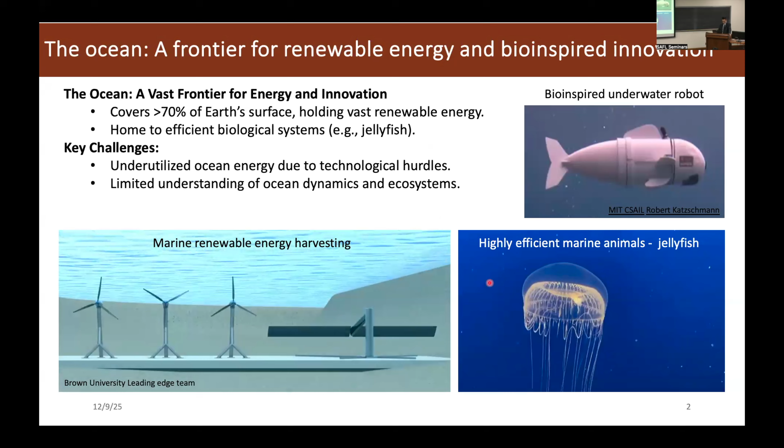But despite those potentials and innovations, ocean energy is still underutilized due to many technological challenges, for example, harsh conditions, difficulties in maintenance, etc. And our understanding of this ecosystem is also limited, and thus there is an urgent need to advance technologies and innovations to help us explore this underwater environment. The good news is that nature has solved many of those challenges for us. For example, marine animals, jellyfish, and krill have evolved highly efficient ways to move, and we can use these strategies to inspire the design of bio-inspired robots and energy harvesting systems.

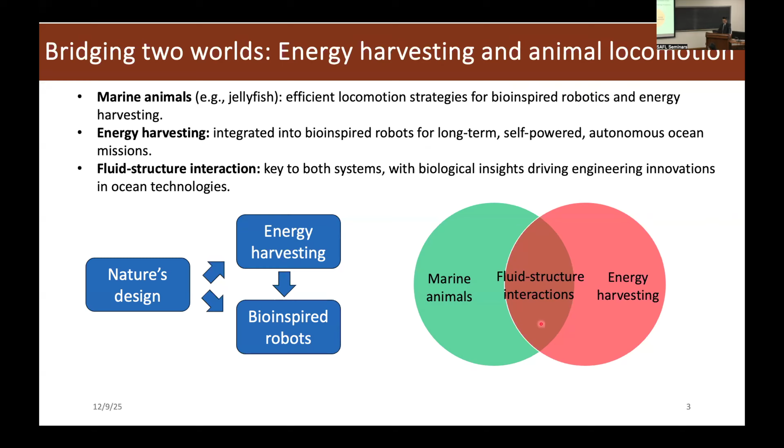And those energy harvesting systems can also be miniaturized and integrated into bio-inspired robots to enable long-term self-powered autonomous ocean missions, which also reduces the reliance on external power sources and extends operational capabilities. The key aspect between marine animals and energy harvesting is fluid-structure interaction, as you can see here. Understanding this interaction is crucial to maximize efficiency and adaptability in underwater settings. To explore those challenges and opportunities, I identified 3 questions in my research. First, how can we optimize energy extraction from ocean flows in various forms? Second, what can we learn from biological locomotion? And third, how can we bridge energy extraction and biological propulsion?

These are large topics, and I don't think I can cover all of them. But in today's talk, I will be talking about mainly 2 parts. The first one is about ocean renewable energy harvesting, with examples in tandem foil energy harvesting. Then I will introduce a cyber-physical system, with 2 examples, a short example about energy harvesting, and the other one about flow-induced vibrations. And then I will talk about marine animal locomotion, such as krill swimming, jellyfish swimming, etc. Then I will wrap up. So, ocean energy harvesting. Energy is essential to modern society.

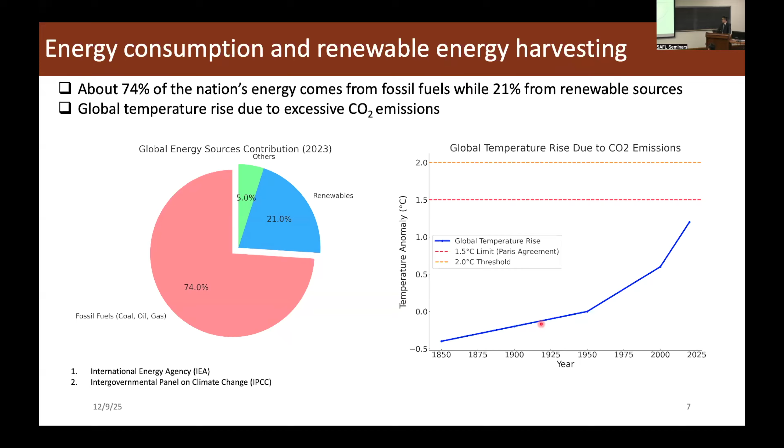However, most of those primary energy sources are unsustainable. As you can see in this chart, more than 74% is from fossil fuels, while only 21% is from renewable sources. And the reliance on those fossil fuels can contribute to greenhouse gas emissions, and then potentially cause the rise of global temperature and climate change.

And transitioning to renewable energy sources is crucial to mitigate those environmental impacts. Among those, ocean energy is abundant and largely untapped. For example, ocean wave energy can be harnessed using the up and down motion of buoys. And ocean flow energy can be captured using rotary turbines, which are very similar to wind turbines, as you can see here, and also flapping foils.

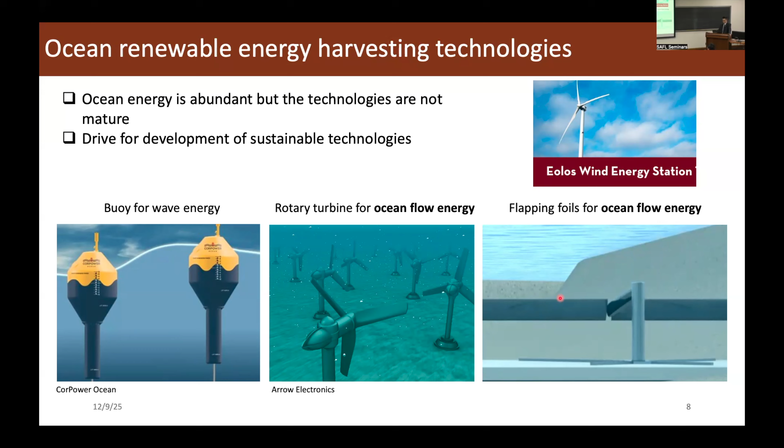Despite its potential, ocean energy research and technologies are far from being fully developed. In this talk, we'll be focusing on ocean flow energy harvesting using flapping foils, as flapping foils present unique advantages in underwater settings. The first is that the tip speed is low compared to rotary turbines, as you can see here, and therefore it is quieter and safer for marine animals.

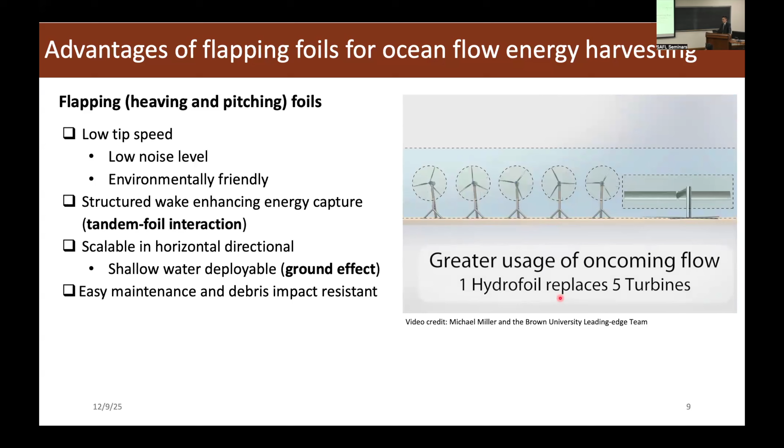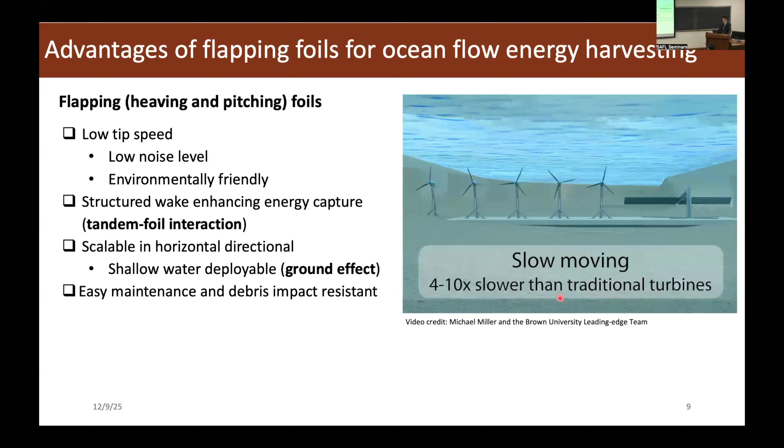Second, the wake of flapping foils is structured with vortices, and these vortices can then be recaptured by nearby or downstream foils to boost their performance, which we'll be talking about later. And the third is that flapping foils are more scalable in the horizontal direction. As you can see here, they're horizontal, which is more ideal for shallow water deployment. Just imagine running this system in a river or in coastal areas.

Okay, so here's the experimental setup we use. Basically, the flapping foil consists of a heaving motion, which is a linear motion, and a pitching motion, which is a rotating motion, with a 90-degree phase offset between these two. You can see in this video here that this is combined. The flow is from left to right, and you can see it going back and forth to extract energy from the flow.

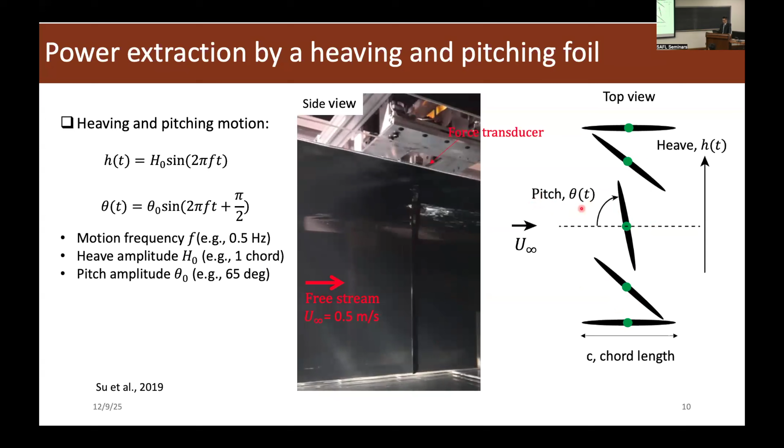Usually we use a sinusoidal waveform, and the parameters include the frequency, heave amplitude, and pitch amplitude. Those are from the literature, and this is the dimensional range, but there's also the non-dimensional range we'll talk about later. This is a sketch of five different locations of the foil so that you can see the angle of attack with respect to the flow angle.

We also have a force transducer on the top to measure the forces, including the lift force, which is in the heave direction, and the torque in the pitch direction. Together we can use these measured forces to calculate the extracted power using this equation. Then we can normalize the power using the total available power in the incoming flow, which is roughly defined by the energy in this flow window width.

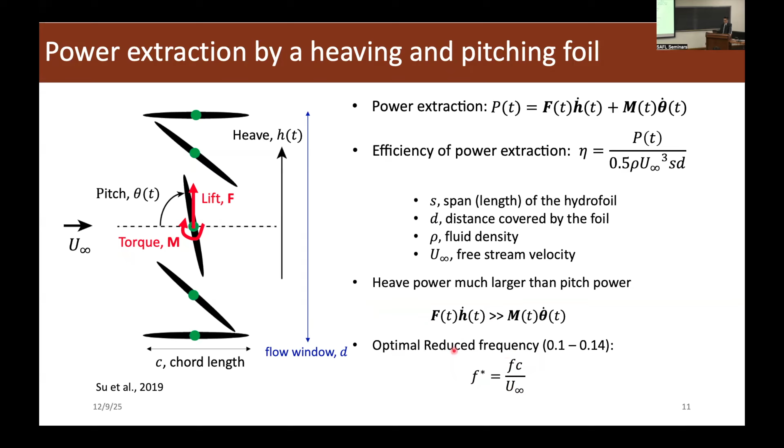One take-home message is that in the flapping foil, the heave component, which is the translating one, is the dominating component compared to the pitch one. Another take-home message is that the optimal reduced frequency range is about 0.1 to 0.14, where the reduced frequency is defined as the motion frequency times the chord length over the freestream velocity. We'll come back to this reduced frequency a little bit.

The first project I would like to talk about in detail is tandem foil energy harvesting. This project was finished at Brown University with Professor Kenny Breuer. There is a lot of literature on single foil energy harvesting using flapping foils, and as I just showed, there are optimal parameters: frequency, heave, and pitch amplitudes. Eventually you want to deploy multiple devices. The simple question is, if you deploy two energy harvesters, one upstream and one downstream, where do you place the downstream foil to get the maximum energy output?

Let's just consider a simple scenario, which is one right behind the other, tandem foils. To address this question, we look at the literature. Tandem foil interaction has been studied in various areas, for example, numerical simulation, tandem insect wings like in the dragonfly, and also fish fins, etc.

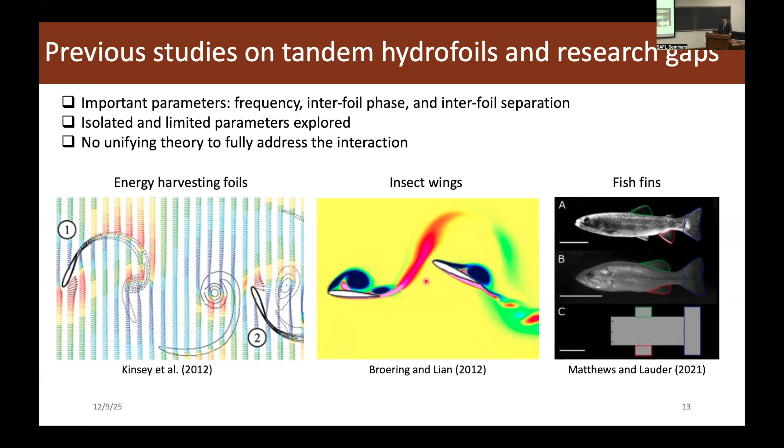Also, researchers identify a few important variables or parameters, such as the phase between those two foils and frequency, etc. But the question is that those explored parameters are isolated or limited, and that is to say those identified optimal parameters in one case might not work for other cases with different configurations, with different sizes, with different spacing, with different parameters. Basically, it's only true for that specific explored case. There's no unified theory that can describe those tandem foil interactions, especially the performance of the trailing foil.

So to find this, we did some lab experiments. So we have two foils in the flume. One is upstream, one downstream. I have two force transducers to measure the force. And then we prescribe those two foils to have the same kinematics, the same heave, pitch amplitude, the same frequency. And the only different thing is there's a phase in between. There's a phase psi here.

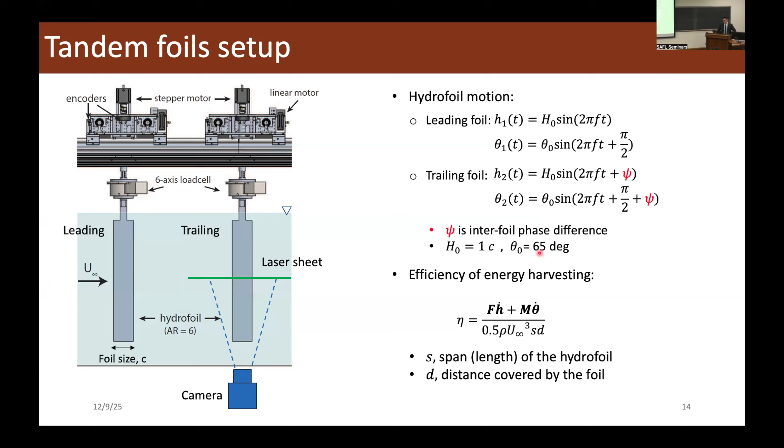Basically, if psi is 0, that means two foils are running the same way. If it's 180 degrees, running back and forth this way, if the flow is in the other direction. And so the phase is an important parameter here. And we set the heave amplitude and pitch amplitude the same for both. And we then estimate the energy harvesting performance for both foils using the same equation here. Also, we visualize the flow using PIV experiments to better understand what is going on there.

So yeah, let's look at the results. So we have two foils. In this sketch, we fixed the separation between the foils to be 6 chords, uniform flow, and then we vary the phase in between them. We basically sweep through all the phases from minus pi to pi, or from minus 180 degrees to 180 degrees. And each dot here is one run: we run the system at one specific phase, and then we estimate the efficiency.

So, for example, here we explore 4 different reduced frequencies. And for each reduced frequency, we have a curve for the leading foil and a curve for the trailing foil, and the performance at different phases. And first thing we can see is that the efficiency for the leading foil does not change with respect to the interfoil phase, which is reasonable because the leading foil is 6 chords upstream of the trailing. The disturbance cannot travel upstream considering the flow velocity.

But we can see that the trailing foil efficiency varies a lot with respect to the interfoil phase psi as well as the frequency. You can see the red curve has the maximum around minus pi over 2. For the cyan curve, the maximum is around maybe minus pi.

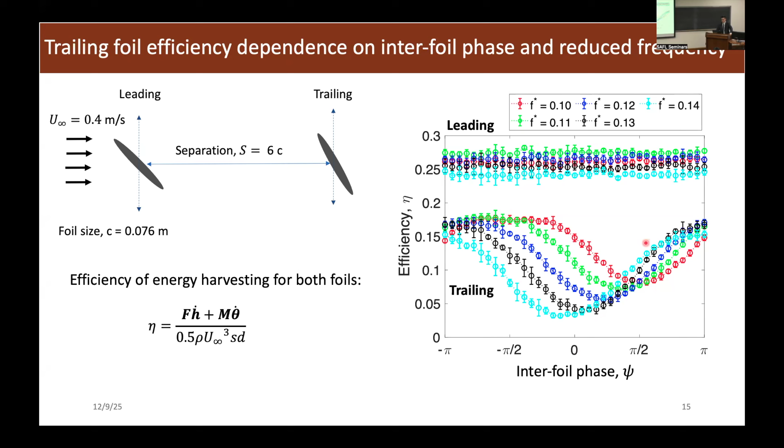So this dependence might be really a big problem if you want to design such a tandem foil energy harvester, because you don't know where to put the second foil in order to get the maximum energy out without building and testing it, right? You have to test it. Okay, yeah, this is the maximum position and maximum energy at this specific position. So without knowing this beforehand, you cannot design this.

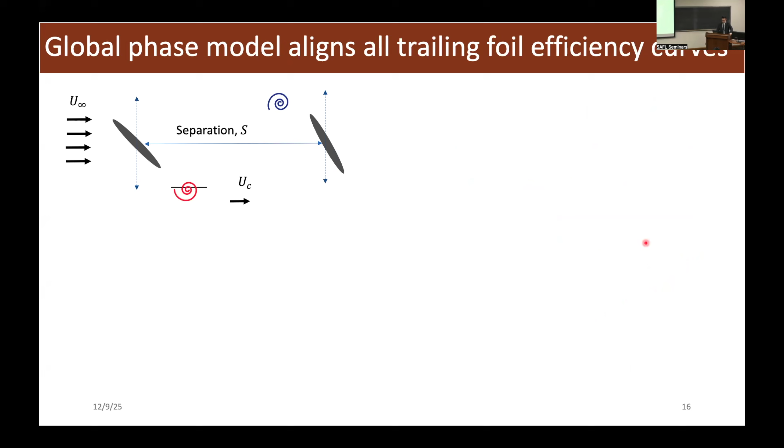And then, so let's try to understand this data. Because the wake from the leading foil will be traveling downstream and affect the trailing foil, we first look at the convection time the wake travels from leading to trailing, which is given by the separation divided by the convection velocity here. And then we can estimate the convection phase, which is with respect to 2 pi f t. And then we can reorganize the convection phase with respect to the reduced frequency and the dimensionless separation.

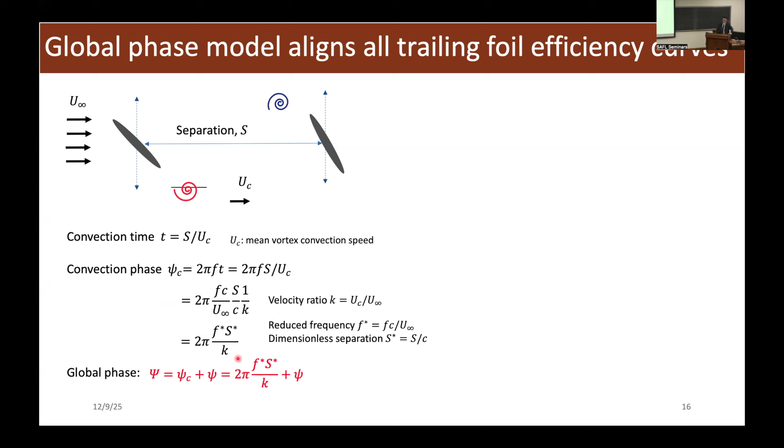Here we define a velocity ratio, which is the convection velocity over the free stream velocity. So now in this final form, the convection phase in terms of the reduced frequency, dimensionless separation, and the velocity ratio are all dimensionless. It's not depending on any size, foil size, or the distance. And then we combine this phase, because the effect is both the convection phase and the interfoil phase over here.

And now we use the global phase, which is the sum of the convection phase and the interfoil phase. We then replot the efficiency with respect to this global phase. We can see that all those curves now align, with minimum efficiency at 0 global phase and maximum at minus pi or pi.

This sense is working. But this is also validated at one case, that means one separation and one flow speed. What about other conditions? Yep. Just want to get some clarification on the Reynolds number regime where the energy harvester is located. I don't know whether you have the Reynolds number somewhere. Is there a region for this periodic vortex shedding?

Yes, good question. The Reynolds number region is about 50K, 50,000. It is within this vortex shedding region. There's a large vortex shedding with this specific frequency, heave amplitude and pitch amplitude. You will be seeing those in the PIV measurements in later slides.

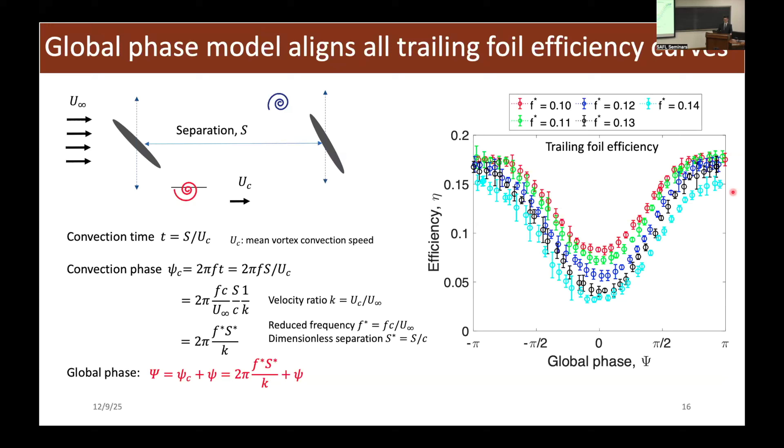So you design the chord length. The chord length, yes, exactly. Incoming flow speed. Set your Reynolds number within the region. Yeah. So, for example, in this case, if it's 0.53 meters per second, the Reynolds number will be about 50,000.

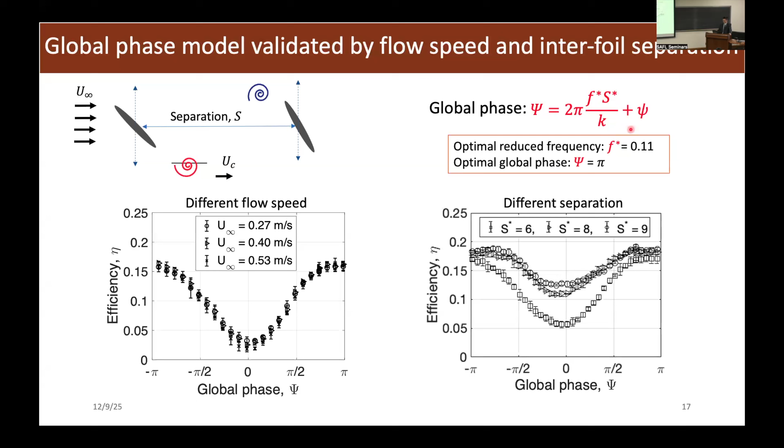In this case, when you want to design a tandem foil energy harvester, you just need to plug in your parameters. For example, you want the spacing to be 9 or 6 chords, and you want your reduced frequency to be 0.1 or 0.11, which is the optimal range. Then you plug your numbers into this global phase model, and it will give you a corresponding interfoil phase. With this phase, you will get the optimal energy output for the trailing foil.

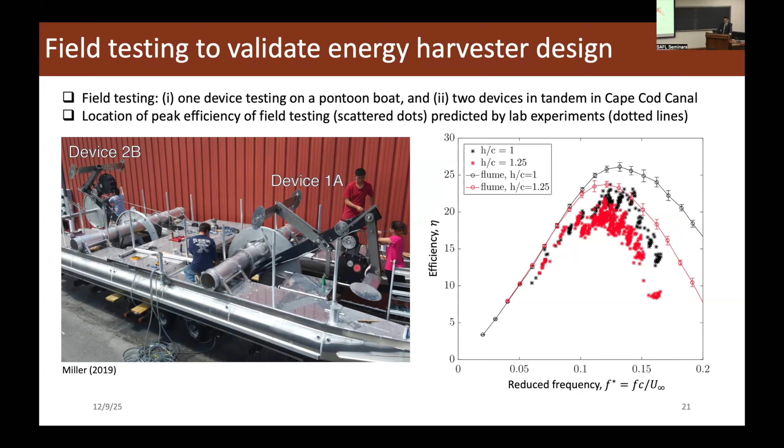And I just want to show some quick results. Basically, I want to confirm the flume efficiency and also the field efficiency. The flume efficiency results are those dotted lines, and the field results are those stars. You can see that they have good alignment with respect to this optimal reduced frequency here, and considering all those frictions, the efficiency is matching really well. And here we have this electricity generator to measure the generated power.

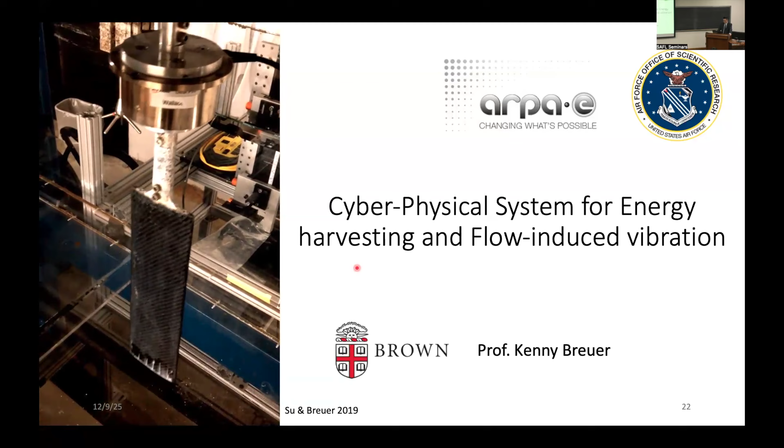Okay, so the second project of the first part: I would like to introduce the cyber-physical system for you, especially because it's very powerful and very relevant in water tunnel or wind tunnel experiments. This project was also finished at Brown University with Professor Kenny Breuer, and I will briefly talk about energy harvesting using the cyber-physical system.

Before that, I would like to talk about prescribed and flow-driven systems. In the previous example, the tandem foil, that's a prescribed system. That means I prescribe the sinusoidal motion, measure the force, and then estimate the energy harvesting efficiency. But that's one-way coupling. In reality, the real thing should be flow-driven, so you don't prescribe the motion, but the motion is driven by the flow. The fluid force together with the structural force will determine the frequency and the motion parameters. This is called two-way coupling.

But usually in real experiments and also in deployment, flow-driven systems are not easy to implement, especially if you want to explore multiple different parameters, for example, different damping, different stiffness, different mass. It is hard to do that. So we use a cyber-physical system to do so.

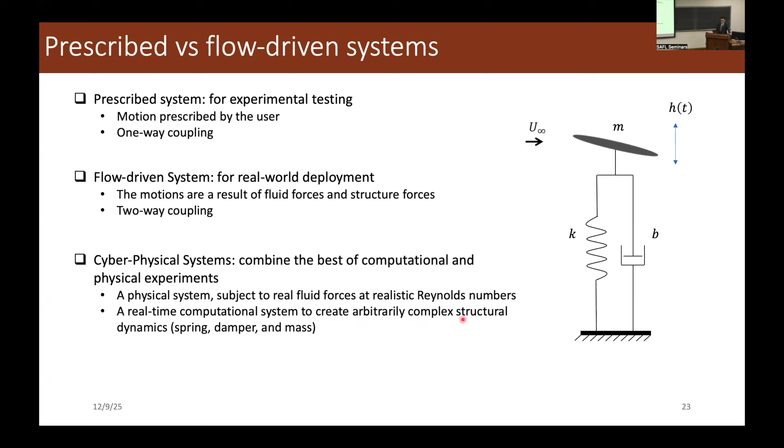The cyber-physical system basically has two components. One is the physical part: for example, a physical foil in the water flume, measuring the forces, that can be controlled to go back and forth. And it has a computational system that takes those forces and outputs some arbitrary complex structural dynamics. I will give you a very quick example. This is the cyber-physical system I designed at Brown. This is only the heave component; heave motion is controlled by the cyber-physical system.

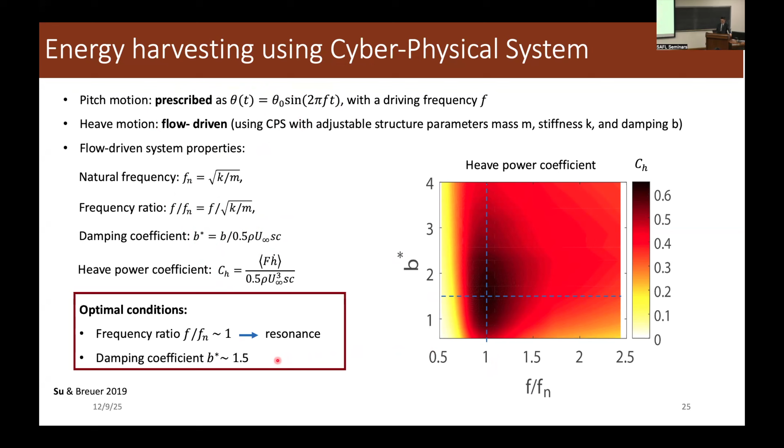That means that in this cyber-physical system, we can still get this energy harvesting with really high efficiency out of the system. This is a very quick example, but I would like to talk more about other applications using the cyber-physical system, especially flow-induced vibration, because you can see a lot of examples of flow-induced vibration.

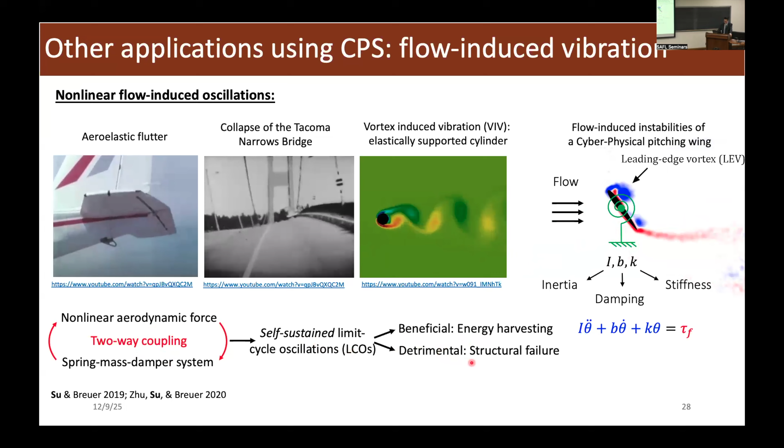So this is a two-way coupling with those nonlinear aerodynamic forces. I'd like to show this. It can be simplified as this kind of system, an elastically mounted pitching wing. It is a two-way coupling between the aerodynamic force and the spring mass damper system, and it could be good if you can control it and use it for energy harvesting, or it can be bad, especially for structural failure.

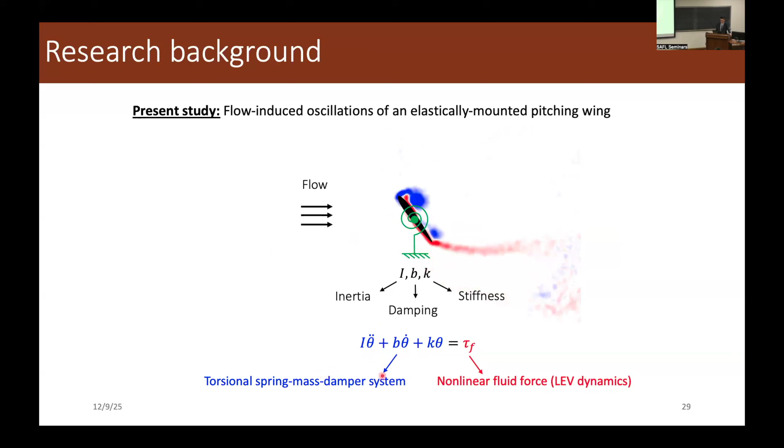So this is basically the setup. You have a uniform flow coming, and you have an airfoil or wing in this flow. The wing is elastically mounted by this spring mass damper system. For example, you can set the spring to be really large at the very beginning, and it will be static, not moving at all. And then you have two systems, the structural force and the fluid force here.

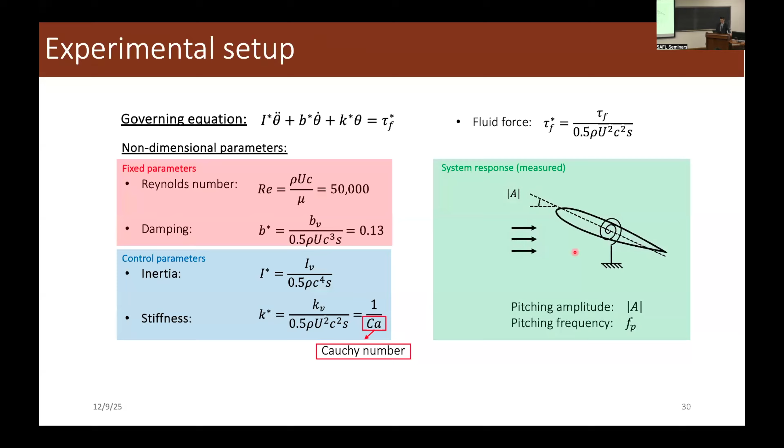The governing equation is similar to the heaving part, and the Reynolds number in this case is 50,000, which is a fixed parameter. The damping coefficient is 0.13; we normalize the damping using the fluid properties. The control parameters that we vary are the inertia and the stiffness. The stiffness here is actually the inverse of the Cauchy number. And the output parameters are the amplitude of the wing and the frequency of the oscillation.

So let's look at some quick, simple results. The output is the amplitude and the frequency. Let's first look at the amplitude response at different inertia. This is really low inertia compared to the fluid inertia. In this free stream flow, we mount the airfoil at zero angle of attack. To start, we set the spring stiffness large so there's no motion at all. When we decrease the stiffness, at some point it starts to oscillate.

This is a small amplitude oscillation, and as we further decrease the stiffness, the oscillation gets larger and larger. When we increase the stiffness back, the amplitude follows the same path back to where it was. This is called the supercritical bifurcation: a very smooth amplitude transition going up, and no hysteresis.

Now, when we change the inertia to much higher, 30 times higher, the same experiment, zero angle of attack at the beginning, and decrease the stiffness. We also see some small amplitude oscillation, and then suddenly it jumps to this large limit cycle oscillation. If we decrease the stiffness more, it gets larger and larger amplitude.

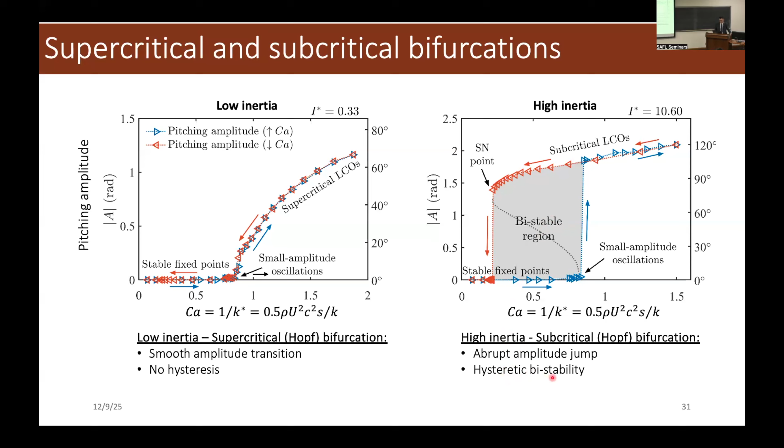So then what about those inertias in between? We look at those multiple inertias and plot those curves. We can see that when we decrease the inertia here, those bifurcation curves move from left to right. This is how it moves.

And especially in this case, we can see that for multiple different inertias, the onset point, where the amplitude jumps, is the same for all those different inertias. But the disappearing point is different. You can see here the different disappearing points.

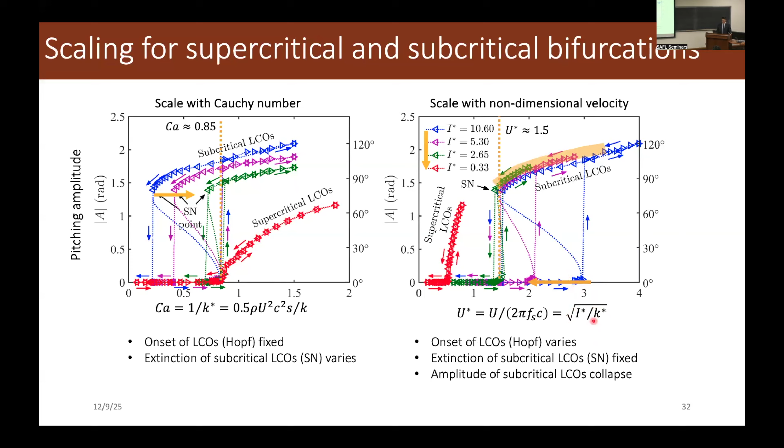But if you use another scaling, which is the dimensionless velocity, this is the velocity non-dimensionalized by the structural frequency or the natural frequency. And you can rearrange the terms to give the inertia over the stiffness. In this case, the onset is now different for different inertias, but the disappearing point is now the same for all those high inertia cases. This is because the inertia is taken into account in this case.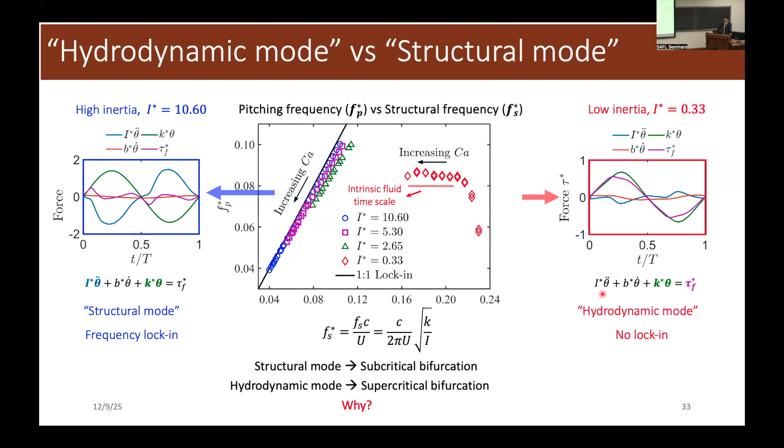And then the question is, why is it doing this? We look at this problem from an energy approach. Basically, the energy transfer is the hydrokinetic energy transfer into the pitching system. Mathematically, if you multiply by the velocity on both sides, these two terms cancel because they're out of phase when doing the time integral over a cycle. The only remaining terms are the fluid force and the damping force.

For example, the fluid force will be injecting energy into the system, and the damping term will be consuming this energy, just like an electricity generator. That's the damping. Or you go to the gym and you're pulling this; it's damping. You have mechanical energy transferred into the damping.

When it is at steady state, oscillating without any change of amplitude and frequency, the energy budget will balance. That means the fluid energy will be damped out exactly by the damper. So that's why the sum will be 0 here.

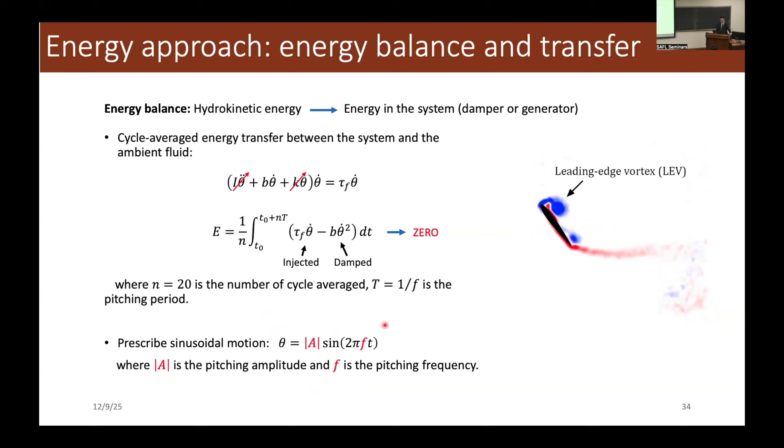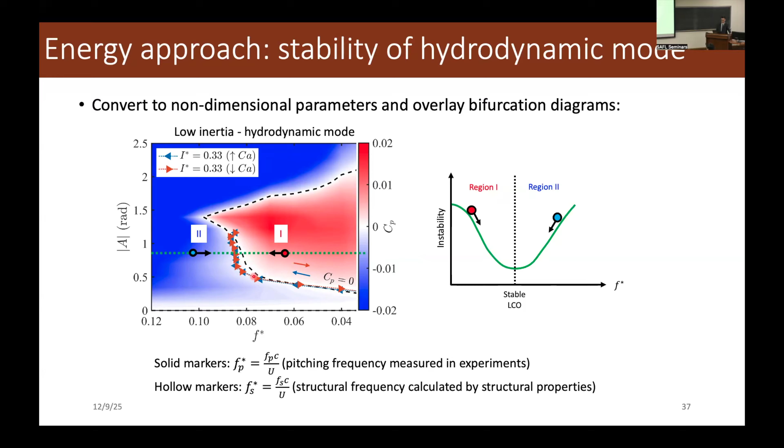Similarly, if you have more energy, the system will grow by increasing the frequency. That's why it's traveling left to right, and eventually it will stay on this stable curve, the lower branch over here. This is a very quick explanation of why we have these 2 bifurcation branches here.

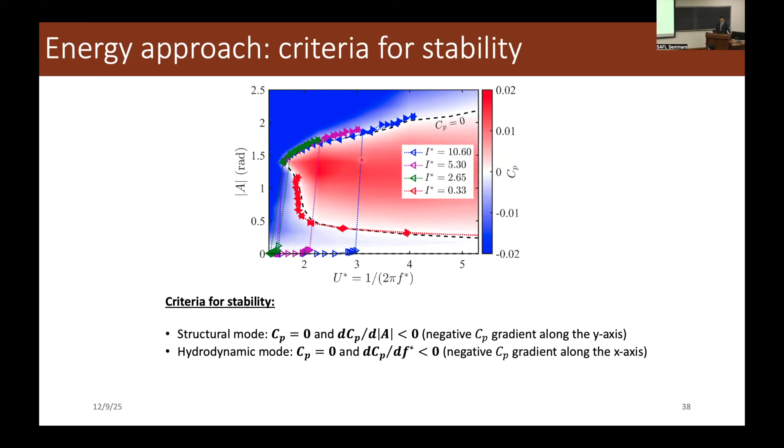And this is the criteria for the stability. Basically, it's the gradient. For the structural mode, the power gradient with respect to the amplitude needs to be negative. That means it has to go towards the amplitude decreasing direction.

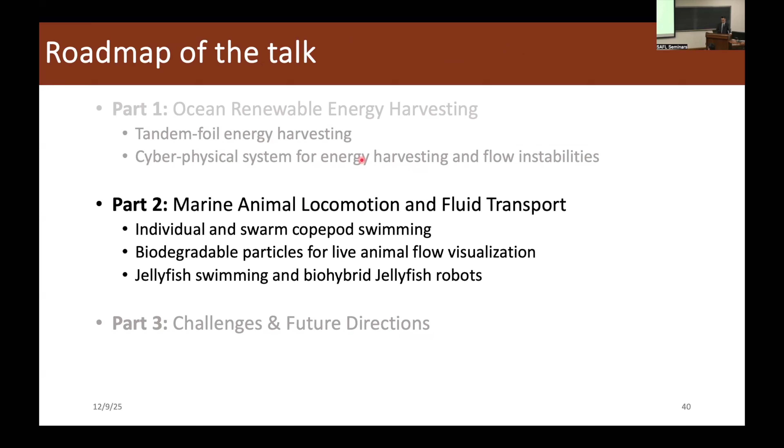So this is a quick summary of part 1, and then I will move to part 2. I will briefly talk about 3 quick projects about animal locomotion. The first one is about marine organism copepod swimming, individual and swarm migration. Before that, I would like to introduce a term called diel vertical migration. It's a daily synchronized animal migration between the surface layer of water and the deeper layer of water. Those animals move in a daily manner up and down.

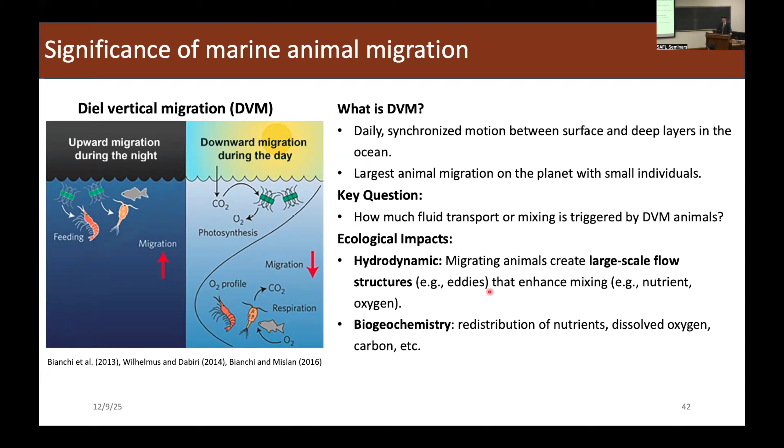So it can potentially bring oxygen-rich water from the top to the bottom, and bring nutrients from the bottom to the top. To understand this question further, we use the copepod to see its potential effects in lab experiments. First, we look at individual copepod swimming. We use this in-house micro PIV, a particle shadow velocimetry, and we use algae as the tracer particles.

And here is the experiment about a swarm migration of copepods. Here we use this setup: basically those copepods are phototactic, and we first concentrate them at the bottom, and then turn on the laser on the top and turn off the laser on the bottom. So the copepods will then migrate towards the top. And the same way you can create a downward migration as well.

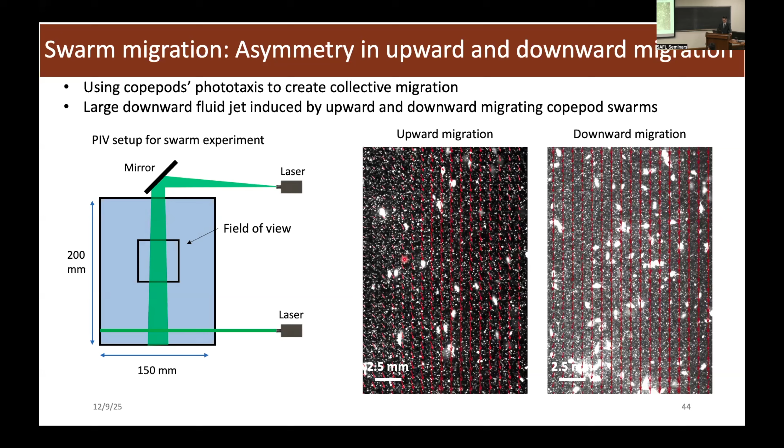People usually think, okay, for the downward migration, they would generate an upward jet because you need to push the fluid backward to get this forward momentum. But it turns out, no, the opposite. And this could have some potential impact on fluid transport.

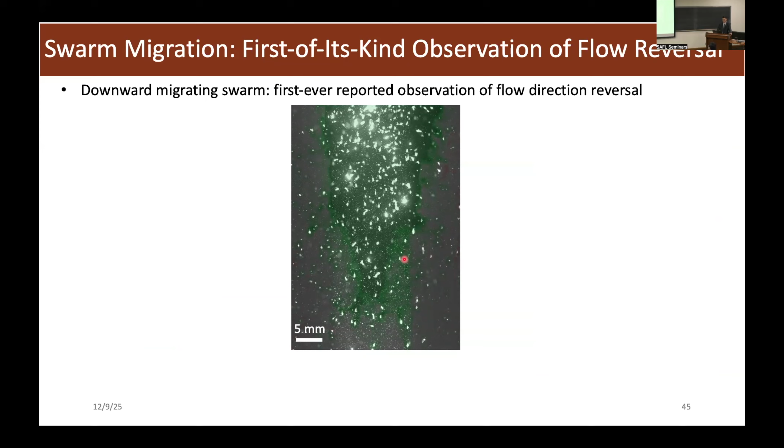But before we talk about that, we want to introduce another very interesting observation, which is also downward migration of copepods, and we changed the color code. Basically, green is the velocity going down, and red is going up. You can see at the very beginning it is green, and then it transitions to red, meaning the induced flow field is upward. And then gradually it transitions back to green again. This is kind of like flow reversal.

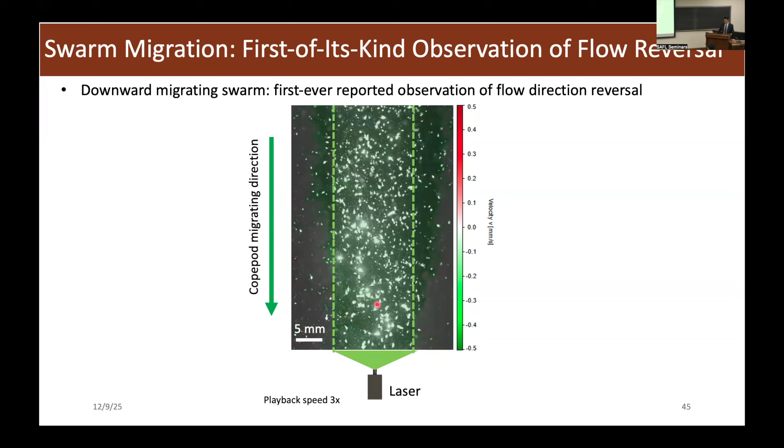Let's play that again. So this is a really interesting part. We have not yet figured out why it is doing so, but we're trying different ways. Yep. The flow is using very small tracer particles, PIV particles. Yeah, much smaller. So, a very interesting observation, still trying to understand why it's doing so.

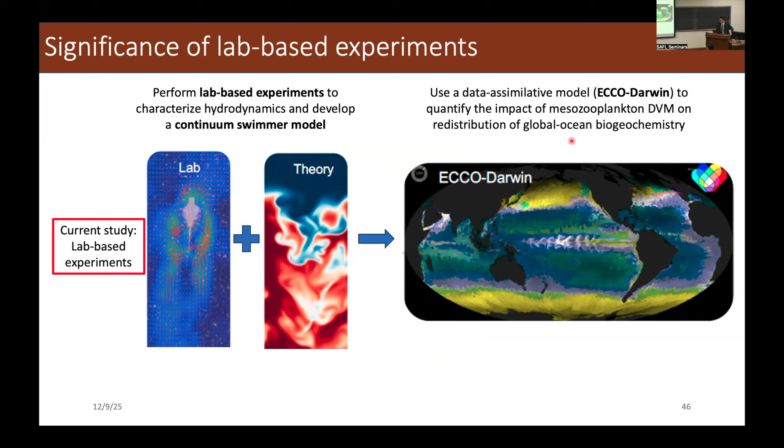And then coming back to this potential impact. Basically what we're doing is a lab scale experiment, and we're trying to use those flow fields, flow characteristics, to inform a continuum swimmer model, and then use this information to feed into an even larger global ocean biogeochemistry model that our collaborators are working on. This is basically what we're doing in this project.

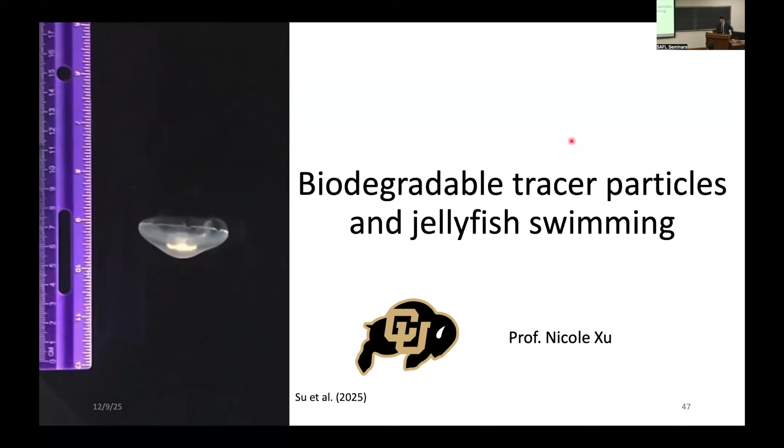And then I would like to jump to jellyfish swimming. We are doing live animal PIV experiments, and the issue is that the animals do not like those commercial synthetic particles. In PIV, they might just intake those particles as food, but they cannot digest them. So that could be an issue for the animal's health. So we're trying to find some biodegradable particles for this live animal experiment.

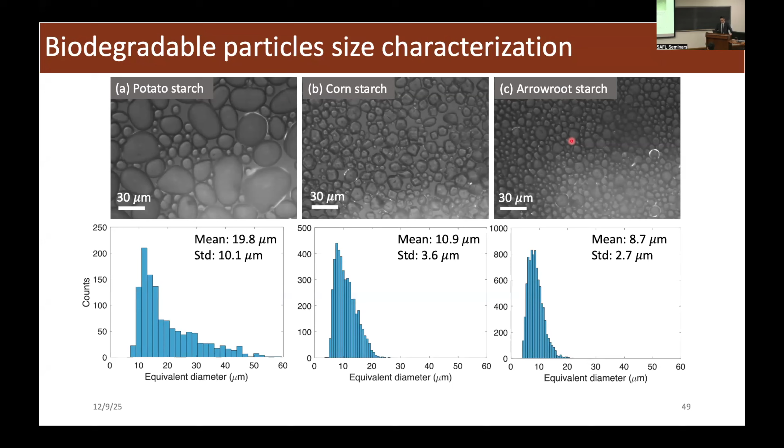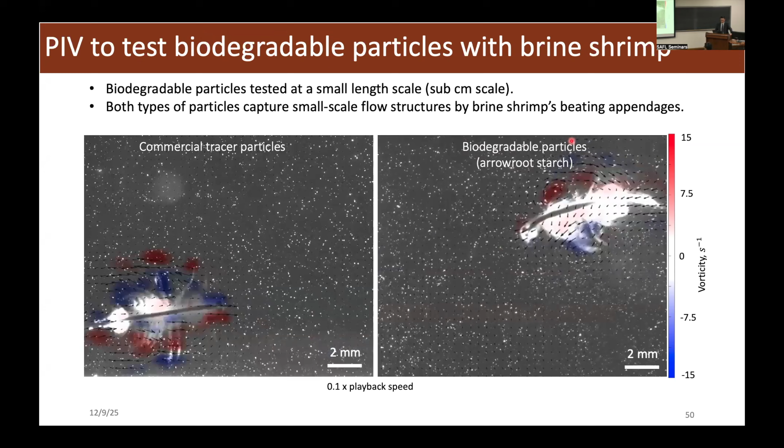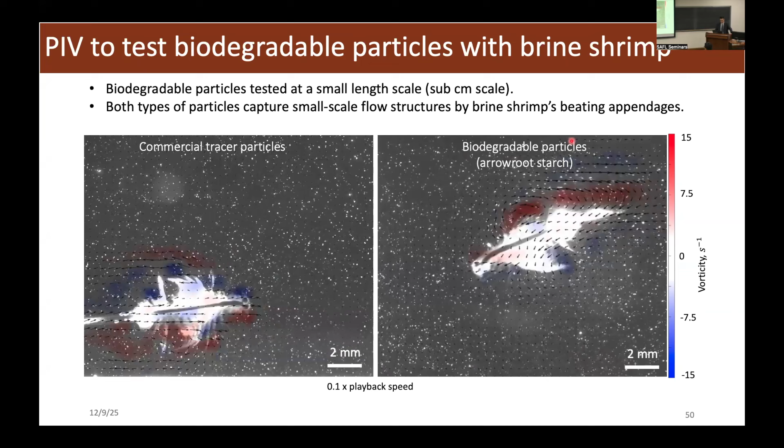So basically we identified a few, for example starch: corn starch, potato starch, and arrowroot starch. We explored multiple of them, took microscopic images and looked at the distribution and the sizes. Then we tested this with brine shrimp, a very small creature. They can basically take this as food. If those are commercial particles, they can malfunction after that. The left is the commercial one, the right is the biodegradable one. You have very comparable flow fields, a very qualitative measurement here.

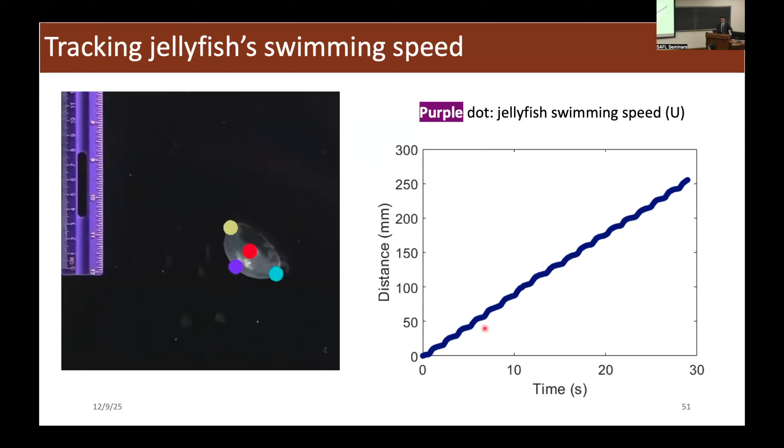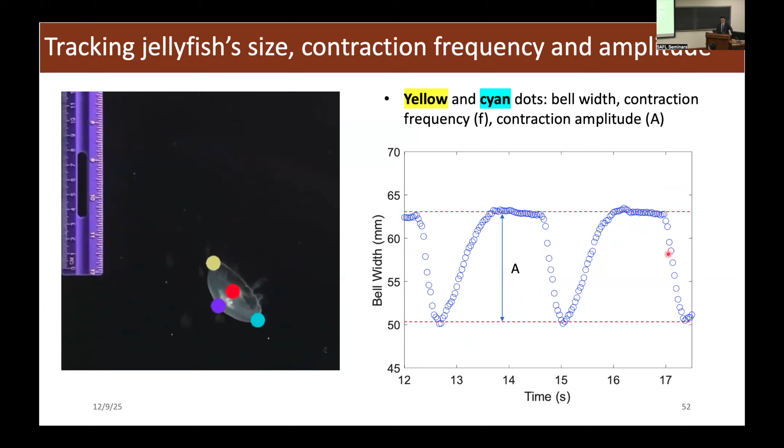And then another part is the jellyfish swimming. I would like to show some quick results. We are able to track the jellyfish, their position and morphology, basically in real time. For example, this purple dot is the time history, and using this you can calculate the swimming speed of the jellyfish. You can also use the yellow and the cyan dots to look at the contraction of the jellyfish bell. You can see the contraction, the relaxation, then wait for some time, and then another contraction, another relaxation,

another one. So then we analyze the jellyfish swimming speed and try to find some scaling for that. This is a scaling used in fish swimming, flapping fin fish swimming. It is given as Reynolds number proportional to the swim number to the 4/3. The swim number is defined by the beating frequency, the amplitude, the diameter and the viscosity.

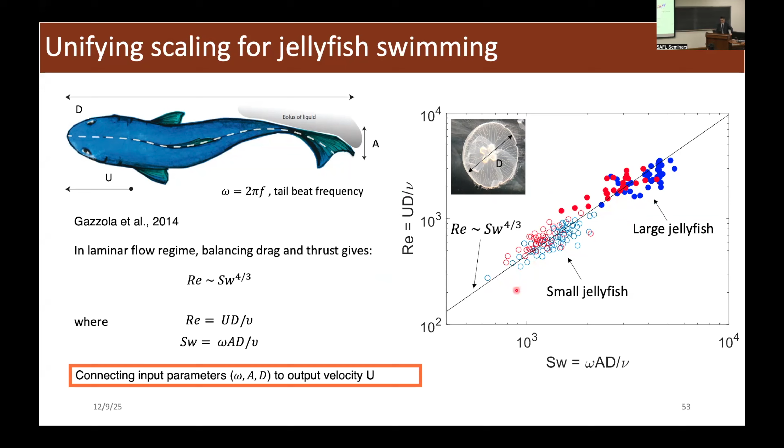If we use the same scaling for the jellyfish swimming speed, for different sizes, small jellyfish, large jellyfish, the different dots are for different repetitions. We repeat this experiment multiple times, and the same jellyfish might behave with different swimming speeds at different trials. That's why we take as many trials as possible. And then we plot it here. You can see that the jellyfish swimming actually follows this pattern really well.

And then jellyfish can also be used as a robot, basically. And this is the biohybrid jellyfish robot. Hybrid means the jellyfish is still alive, and then we're embedding these microcontrollers to control their motion. So why jellyfish? Because jellyfish is very simple, and their neural system can be actuated by simple electric pulses, just 4 volts. If you supply these electric pulses, the jellyfish will respond and contract.

And then through this, you can basically control the contraction of the jellyfish while it is still alive, and move forward, as you can see in this case. And this is the field experiment you can see in this case, and this is the jellyfish. And this is what I will try to replicate in my lab as well, and move forward beyond this.

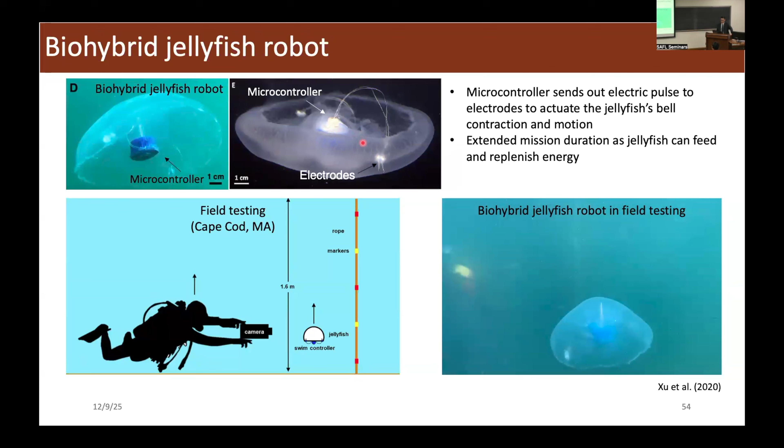And especially the challenge in this project is that now you can go straight, but the turning part is difficult. We cannot make it turn in this way.

So yeah, the last part I'd like to talk about is the next step. Basically, we'll continue with the energy harvesting flapping foil in very unsteady flow conditions. At the same time, we'd like to look at tandem wings for highly efficient and maneuverable propulsion. And I would like to continue with the zooplankton migration in lakes, utilizing the available devices and resources in the Large Lakes Observatory.